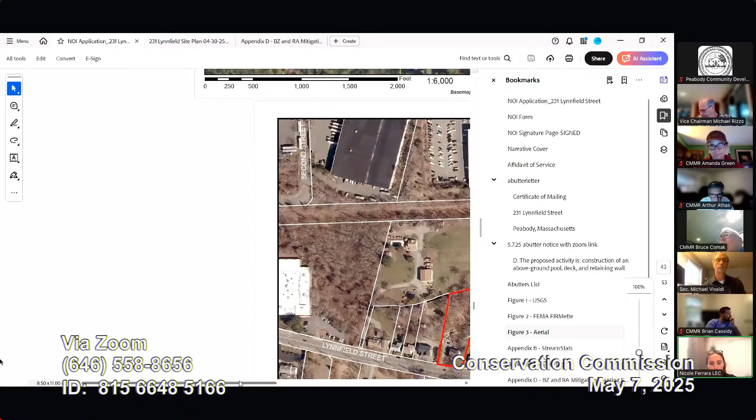Let me zoom in a little bit more. We have an existing driveway that extends northerly from Lynnfield Street to a parking area. I'm going to pull up the site plan so you can get a better sense of the site.

Here's that same property with the existing dwelling and that driveway. We have an existing wooden deck off the rear of the property with some stairs descending to the lawn area. We also have a shed in the back portion of the lawn.

You can see we have an existing lawn edge with this scalloped green line just to the north, and then some forested uplands and wetlands just beyond that lawn edge. You can kind of see the topography slopes moderately, gently to the north, and the dwelling and deck sit on this little hill.

In terms of resource areas, LEC was out in January and March of this year to delineate the wetland boundary. You can see there's a BVW in the north that borders the brook. We have flags 1 through 10, and this black line demarcates the BVW boundary. From there, also in black, we have the 50-foot no-disturbance zone and the 100-foot buffer zone that cuts the property in half.

Also on site, we have an intermittent stream that starts at a headwall along the eastern portion of the property, located within a drainage easement. It's not mapped on the USGS map, but we confirmed the intermittent status with StreamStats. It flows to the north before it merges with Goldthwaite Brook up here. This is the pink line for the intermittent stream, and we are showing the 200-foot buffer zone to that stream, again with this pink line.

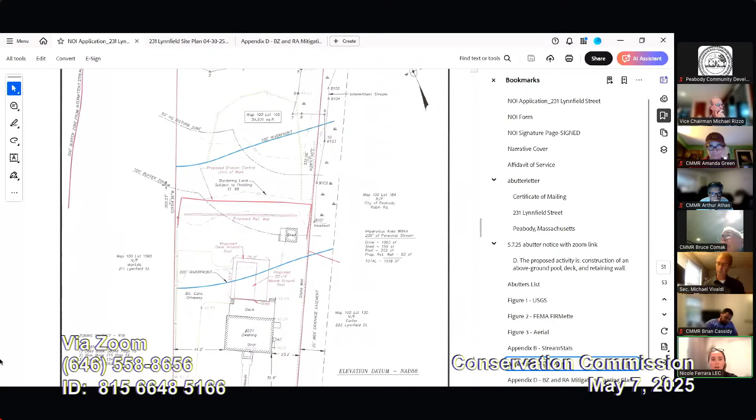You can see the pool and deck are partially located within that 200-foot riverfront area, but outside of the 100-foot buffer zone to the BVW back here. Our last proposed activity, zooming in a little more, is this proposed wall.

The applicant's proposing a 32-inch high natural stone wall that'll be constructed along the existing grade. The wall is within the 200-foot riverfront area and within the buffer zone to BVW, as well as the buffer zone to the intermittent stream. No work is proposed within the floodplain, and no vegetation will be removed as all the work is within the existing lawn area.

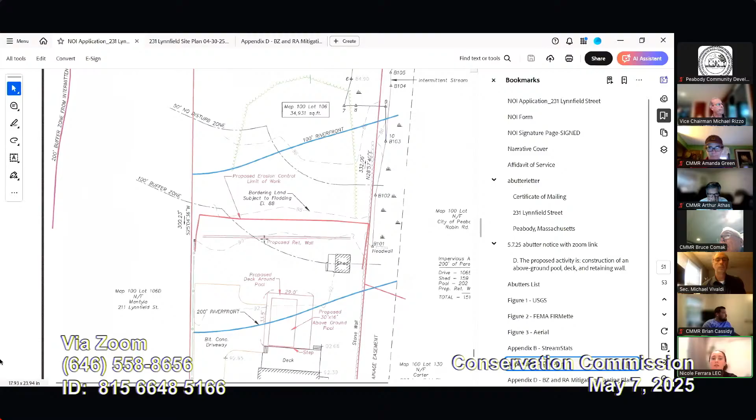For mitigation, we are proposing a limit of work line that is just along the side property boundaries, north of the retaining wall, and then along the other side boundary. It'll be a 12-inch compost sock, and we did include a detail on the plan. We actually did submit a revised plan, I apologize.

Pull that up right here. The revised plan just includes this detail to the right side of the plan here, and then we added the height of the retaining wall as well.

We're also proposing some mitigation planting specifically to meet the riverfront area performance standards. We put together a sketch map showing where we're going to do the plantings. We have a list of native species on the bottom, and we're proposing at least 10 enhancement shrubs within the riverfront area along the lawn edge. The lawn will be removed and replanted with at least 10 of these shrubs, and we expect at least 3 of the species will be represented and installed. That's to improve the function and values of the riverfront area and bordering land subject to flooding, and to offset the work that is slightly closer to the brook than existing conditions.

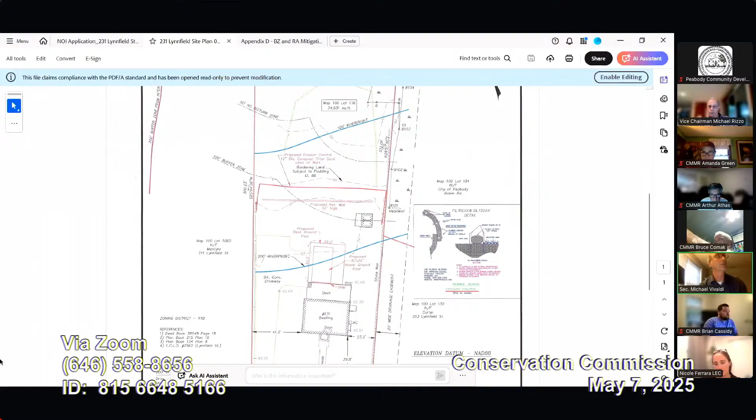I'm guessing on the most northerly part of the pool, at that point you'll probably have to cut into the slope, and the part at the back of the existing deck will be in the ground a foot, maybe half a foot, so the pool is level. Is it going down, or would they have to bring up the backside to level it? No, this is a cut flat in area right here, essentially we have 92.68, 92, so it's about a half a foot difference between back here and this grade.

So the bottom of the pool, or the elevation of the water at the bottom of the pool, at the northerly end should be around elevation 92. I'm thinking he's cutting in to construct the pool up to his deck, unless he's doing it differently. He could let him tell us if he plans on holding, it's like 6 inches, holding the 92.6 grade and leveling out and bringing material in to level it out, and just do a little grading around that. I don't have a problem with that.

Just curious if I don't know what's going on, if he's here, if he knows already how he's gonna do that. Yeah, I believe he works pretty late nights, so I don't believe he's on the meeting, unfortunately. But I believe you can see the grades here that something is going to have to happen to get the pool to be level.

Either way, it'll be a minor change, but that contour at 92, it's either gonna stay 92 or it's gonna be raised up. I'm assuming I don't know whether he's got a machine going in there to grade and level the area for the pool. If it was my house, I'd probably want to cut in at the deck location the 6 inches, so that when you get out to the northerly end, you're at 92 roughly. So you've just got a little bit of the wall of the pool 6 inches in the ground, and the rest blends real nicely with the backyard. Yeah, it'll be all level back there.

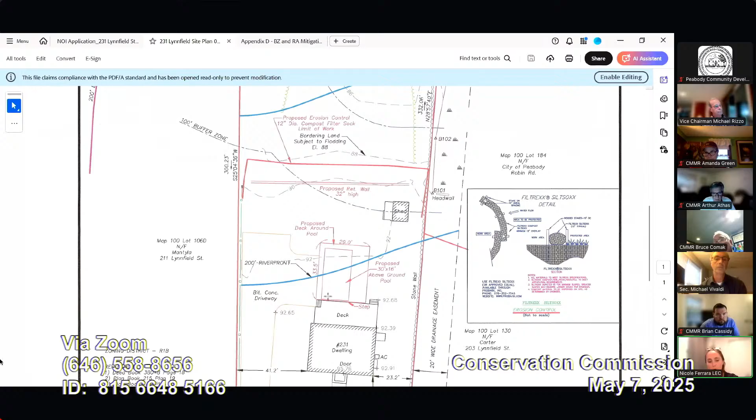Is there any option, have you thought about rotating the pool 90 degrees to try to minimize the disturbance, so it goes further into the other direction? I have not discussed that with the homeowner, but this is the shape. I believe it's an easier way to get from the deck versus having the whole pool taking up the side of the deck. Might just be a preference thing, but we didn't explore that option.

To me, it seems like you could minimize the disturbance, but you'd have to go closer to the edge, probably the property line, to do that. If you rotate it 90 degrees, you'd have to go closer to the property line to fit it in, minimizing the disturbance in the riverfront.

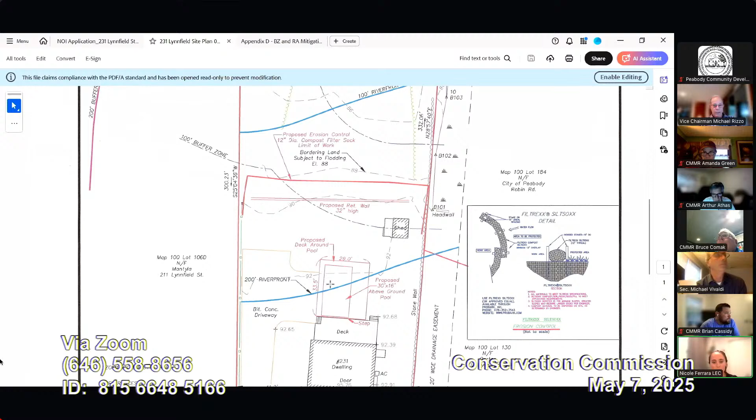The riverfront area. It is only partially within the riverfront area. And like I mentioned, we are doing our restoration plantings with our planting plan here to offset that impact to the riverfront area.

So the planting plan - there's nothing, we don't have a plan that shows where the plantings are, what they are, the type and the quantities. Yep, so we have - I can zoom in. Witch hazel, sweet pepper bush.

So we are proposing 16 shrubs. They will be in groups of 3 to 5 and will be spaced 5 feet apart. And then we have our list of species, and we have asked the applicant to choose at least 3, with each species representing at least 25% of the total, so we have some good representation for the buffer zone there. And then that'll be installed just along the edge of the lawn within that wooded area.

So behind the stone wall, or closer to the house stone wall? That'll be behind, closer to the river. So if we're looking at the site plan, it'll be right along the scalloped edge to further enhance the buffer zone.

Okay, but there's no erosion controls out there though. You're going to be walking out there, digging and planting, but they're just small potted plants, aren't they? Yep, we expect shrubs and I believe 1 or 2 small saplings.

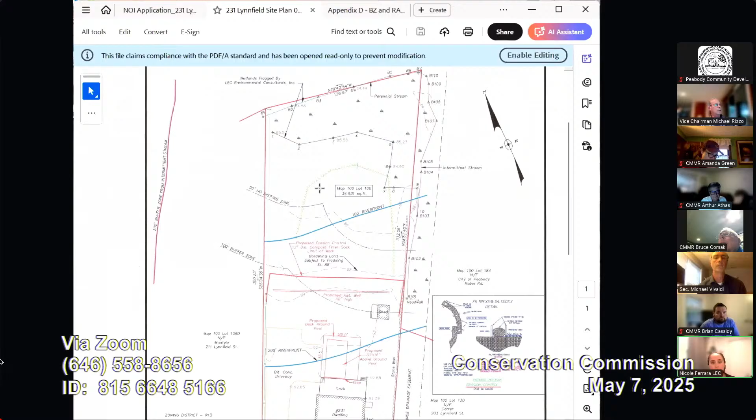Can you show the stone wall again and the existing conditions? Oh, there it is. Yep, so the wetlands are really far back.

So yeah, we have our 100-foot buffer zone here, but we do also have our intermittent stream that runs along the side of the property boundary.

So would you be - is this mitigation, vegetation mitigation, planned for basically along the 88-foot contour line, or is it even further back? We have it a little bit further back towards this lawn edge. Yep, just to kind of extend what's already there of the wooded vegetation.

Would the property owner consider letting that area grow back to its natural state and not maintain it as lawn anymore? I think he would be open to it. We were planning on doing it kind of along this lawn edge. And if the commission insists on having it go fallow, we can definitely discuss that.

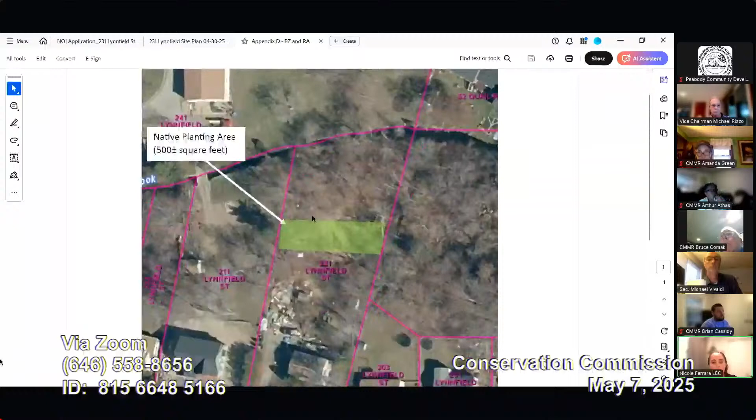Yep, understood. We can edit the plan to add the planting plan on. It'll be in the same - I know it's a little hard to see the lawn edge on the aerial, but just back here in this square, and we can just ask the surveyor to add that same square right here.

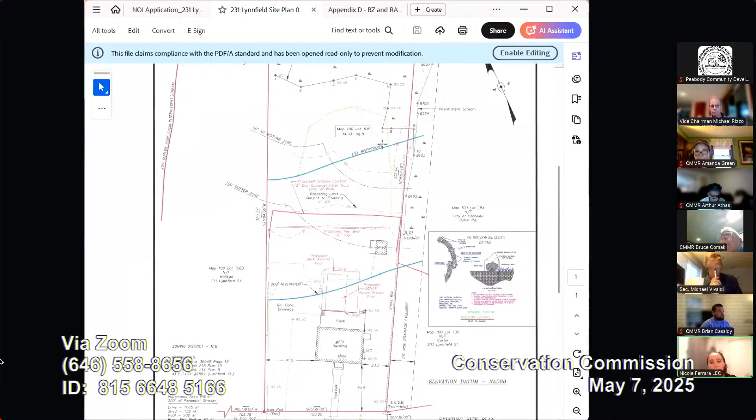I'd like to - and through the chair, could you guys also put the species on it? I think he is a landscaper, but it's just the more stuff that goes on this plan, if I don't work for the city anymore, it's easier for another agent to come in and look at one plan and not have to look for another plan.

Yep, we can add the plants on as well to the plan to make it all in one package. Okay.

I'm okay with that. I'd like to encourage the homeowner to let that grass area in the back become more fallow and in a more natural state.

Through the chair, just because I'm a sucker, I think his kids actually play soccer back there. Yes, they do.

Maybe you guys could request a post and rail fence along where flag 7 and 8 are, and then they could plant behind the fence, and what's beyond the fence can go natural. His kids definitely play there, he was really sweet, he asked if it was okay if they continue to play soccer, and I said of course, but that's up to you guys. So maybe a post and rail fence right before the bordering vegetated wetland, because that will keep people and soccer balls out of the wetland, with the restoration right behind that fence.

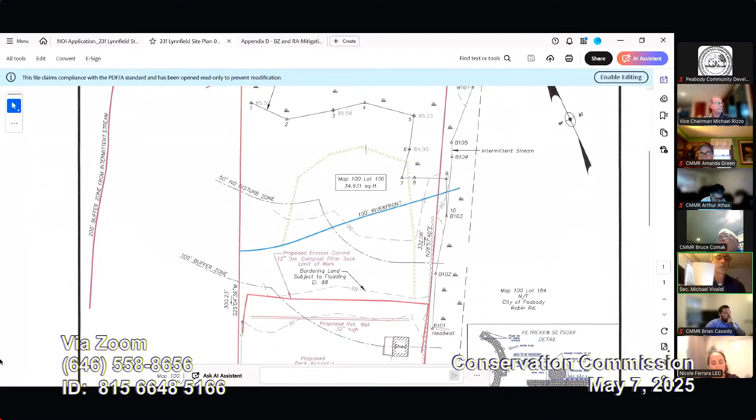Isn't this property close to the YMCA? Or am I mistaken? It is sort of close, it's on the same road. But I thought - is it beyond First Ave or closer to Peabody? Is it going from Summit Street, before Summit, before First Ave? I think it's before First Ave, but I don't know off the top of my head. I believe it's before the YMCA going toward the Lynn Rotary, before Tel Aviv or whatever that is - yeah, I believe it's before First Ave, I'm pretty sure.

Is anyone on the commission - has the commission answered its questions, is it?

I'm basically okay with showing the plants on the plan. But I do want that wall - the name on that wall changed. I want 'retaining wall' taken out, I want it to say 32-inch balanced stone wall, not retaining wall.

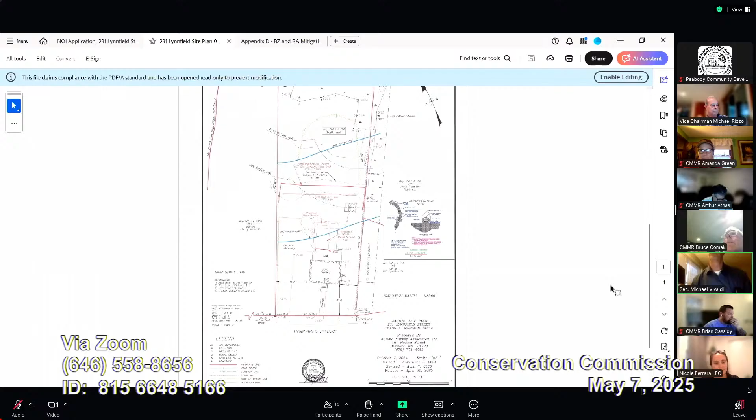Right, we can do that. Along with what Lucia just mentioned regarding the plantings and the post and rail fence. Yes, we have no problem making those changes.

Looks like we're going to request a continuance at this time to make these modifications to the plan. Okay.

Did we want to open it to the public? I don't think there's anyone here, but just in case, if anyone's in the public, please raise your hand now. Seems like no one is there, so go ahead.

So what does the commission want to do - continue this, or close the hearing and issue an order, but make sure we get a revised plan? I'm good with the second one - to close the public hearing and just make sure they update the plan. The summer's coming and I'm sure they want to put up their pool, so I'm okay with that if we can get a revised plan and everything is understood.

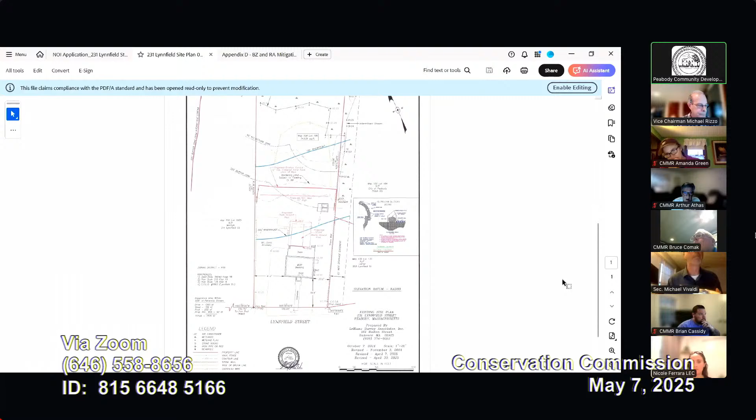Let me just go over what you guys want on the revised plan. You want the retaining wall revised to say 32-inch balanced stone wall. We want the post and rail fence along that back edge, right before where I think that was flag 7 and 8, a little before that, and then the plantings on the other side of that post and rail fence, correct? Close to the wetlands, obviously - the fence would go right where it says map 100, lot, right across that. Yep, right?

Are you guys okay with the commission? Yeah, I agree. I'm okay with that.

I think that's all I wrote down - that you want post and rail plantings on this plan with the names of the plants and quantities, and then the revision of the retaining wall to be called a 32-inch stone wall.

And you guys would obviously make the motion to hold it contingent on the revisions. I would be 100% fine with that.

Correct. And I want to add in a survivorship requirement, like we've done before, for a certain percent of plantings - to make sure they take care of whatever planting they're doing. That's a good point. Thank you, Amanda.

All right, do we have a motion to close? I'll entertain a motion to close the public hearing. Do I have a second? Second. Okay, that motion to close was made by Mr. Athas, seconded by Mr. Vivaldi.

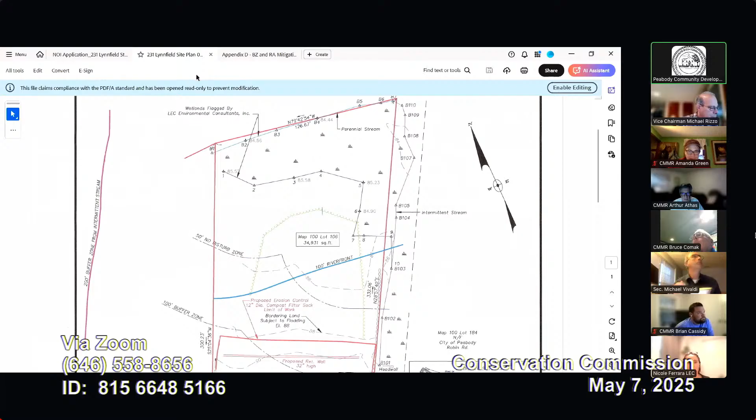Roll call. Vice Chairman Rizzo, yes. Secretary Vivaldi, yes. Commissioner Athas, yes. Commissioner Comak, yes. Commissioner Green, yes. Commissioner Cassidy, yes. All right, so the public hearing is closed, 6-0.

Great, okay, thank you commission members, appreciate it. Now we have to vote to issue an order of conditions.

And recommend standard conditions, standards 1 through 50, and then the provisions for a pool. If they have to lower the water of the pool, they have to make sure the chlorine has dissipated, and no chlorine added for 7 days, so that chlorinated water wouldn't get into the wetlands.

That would be... material to be stockpiled in the driveway as stated on page 12 of the narrative. So what material are we talking about, actually?

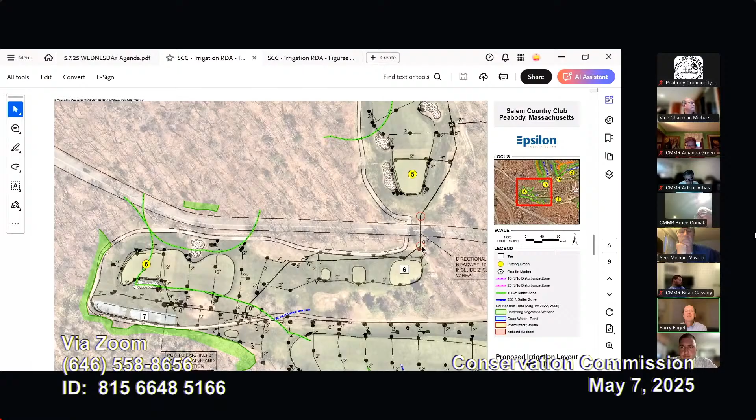One is between the fifth hole green and the sixth hole tee. This is Forest Street here in the middle, and it would be done without any disruption to Forest Street, the stone wall, or any vegetation. These would be pits excavated for directional drilling to put the pipe that connects them under the road. We would work with the DPW and the planning board to confirm there would be no disruption of any kind to Forest Street. So that's one place where this would happen.

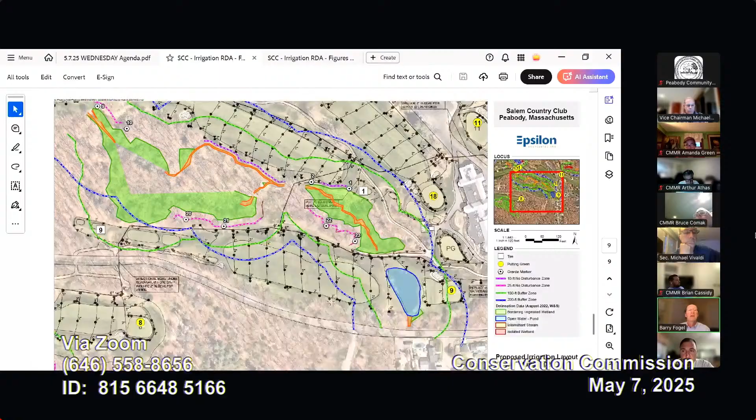The other one is here at the eighth hole. I'm over on the left side of the figure where my cursor is. This is the eighth green, and it would cross the street here. The two locations for the pits are actually shown on the diagram for the eighth hole. Here we go. So here's the pit on one side, let me zoom in, and the other one's up here on the ninth hole. So as I say, here's an example on the eighth hole, only some of the

work is in this buffer zone right here, the 100-foot buffer zone to the wetland. But all of the last structures on that edge are outside of this designated no-disturb zone on the course. We worked with the designer to make sure that all of those sprinkler heads and all of that work is outside of any of the no-disturbs, the few that were placed around the course.

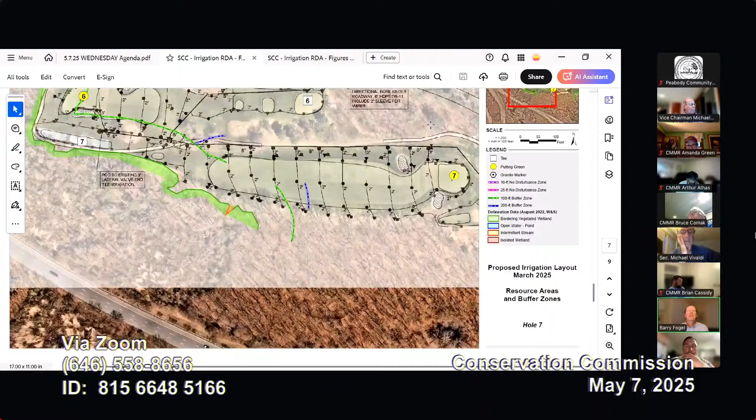Let me share one other diagram. Bear with me. Come on, cursor. Yeah. All right, here we go. So I'll share this. Where's the share? There we go. All right, thank you for your patience on that.

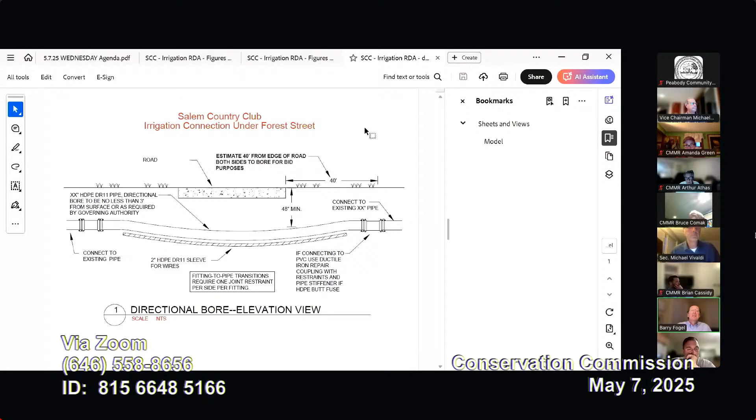Based on the way the design is, it's outside of any resource areas, and with the expectation that we would put erosion controls in the places where, even though there's really no risk, these trenches will be backfilled immediately after the work, the piping is put in place. Bill Rocco can confirm this.

How many days did you think there would be to do work on each hole? 2 to 3. So the work as they're moving through the hole is only going to be occurring over a course of a couple of days. 18 times 3, right? 50 days or plus more. Yes, that's right, that would be the total.

Well, there are actually 2 or 3 holes, I think, that don't have any buffer zone work. So there are 3 of the holes that don't have any activity in any buffer zone. But this will occur periodically over the course of a couple of months, in the late fall, so people can still play the course while they're working on one hole. But the whole course won't be under construction at one time.

With that, we're happy to answer any questions, but our request is that the commission issue a negative determination of applicability for this, with a condition that we work with the commission when the work's going to be done.

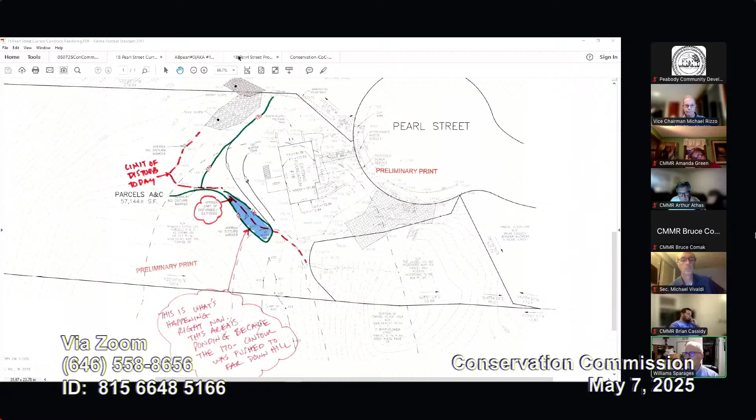My understanding, again, I was just informed by Chris, is that they have spoken with the current owner. I believe Chris did a regrade plan that he showed to Mr. DiBiase, and he also showed to the owner. Let me see if I can get that on here. How about this? Everybody still see this light shade of blue?

Yes, okay. So the idea would be that we would remove the 110 contour that goes a little bit too far down the hill, which is kind of trapping the water and blocking it in this area. By pulling that material back, restoring it, regrading it and vegetating it, that will allow this runoff that's been trapped to continue moving down the slope.

I was informed that the owner was having another engineer review it. I have not heard back, and neither has Lucia. So I don't have any comments from them. I don't have really anything to discuss other than I believe this plan was shared with the owner by Chris Sparages. I did ask Mr. DiBiase today if it was okay to share it with the board, but since we haven't, I really don't have anything. I wish I could say definitively what we're going to do, other than let you ask some questions.

I think it's probably in everyone's interest just to continue the hearing tonight, so that the two parties can work everything out amicably and nobody's making a decision on speculation. Okay, I would support that because I really wouldn't want to enter into any discussion without everybody here. Agreed. So if it's okay with the rest of the board, I would take a motion to continue this to our next meeting. Motion to continue to next meeting.

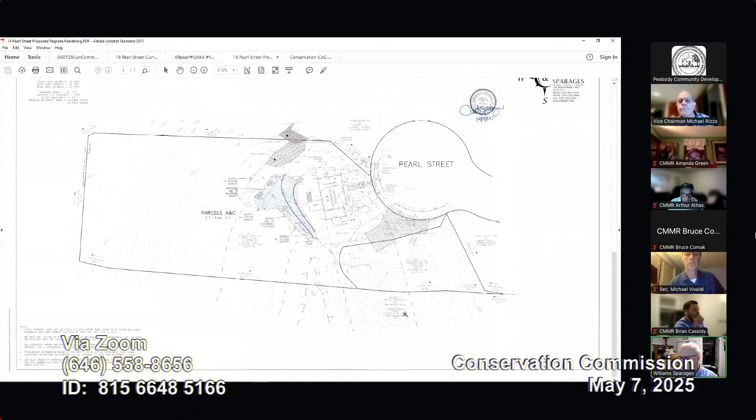The only thing I will say, Lucia, is again on the Laurel Company parcel there - I own that parcel now, so I don't know if that needs to be updated or not. Hang on one second, right here. Yeah, the one - so I'm there, and then it says Laurel, and then it goes to the one we're talking about, the Laurel Company. Well, I'll make sure that we look up the abutters then.

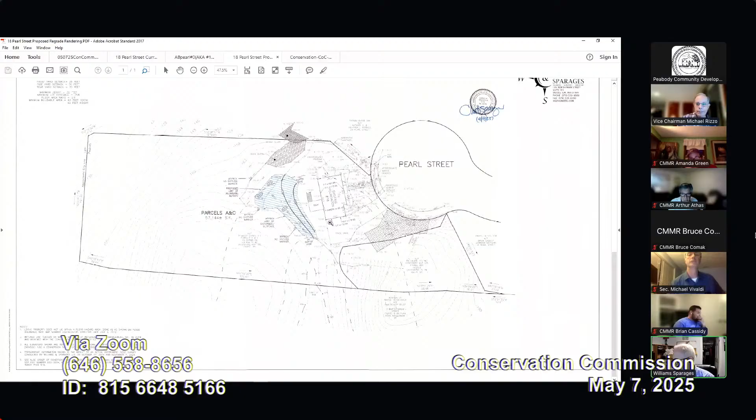Okay, Lucia, do you have this plan? Were you ever given this? No, I haven't been given any revised plans. Okay, I'll send this over to you so you can distribute it to the members, and when we come back again in June, if we have anything from their engineers, fine. If not, like I said, I believe Mr. DiBiase wants to work this through with the owner and get it squared away.

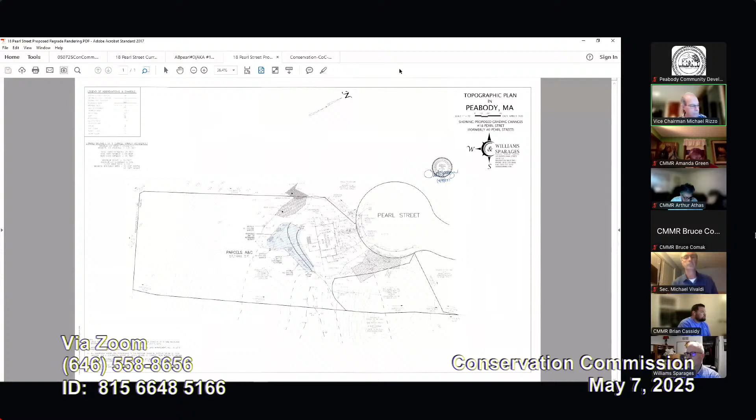Our next item on the agenda is enforcement orders and violation orders. It's item number 6, an enforcement order for 133 Forest Street. I don't know if I have to read the whole thing, but it's already continued to our next June meeting, so no need to make a motion or read it at all.

You do need to read the next one though, 33 Pine Street, which I'll speak on their behalf. Next item on the agenda under enforcement orders is a continued enforcement order issued to Haven Circle Cooperative Corporation, John Hussey, President, for grading of land, possible fill and grade change per the Jersey barrier noted on the site, comparing topographic plans, and creating a stone dust parking and staging area surface without filing a notice of intent. Property address is known as 33 Pine Street, map 34, lot 19 in the city of Peabody.

I'm sorry, I don't know why my video's not working, but anyway, issue with my computer. Mr. Hussey, I assure you guys, he is not blowing you off. He has had a plan since like January. As Mike Rizzo noted last meeting, the NOI was all incorrect, so he brought corrections back to his consultant, and the consultant basically told him he wasn't working with him anymore and he needed to find a new consultant.